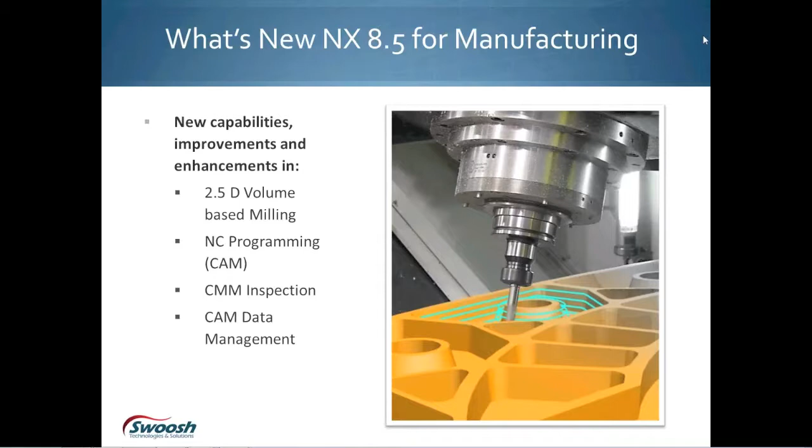So there's a lot of changes. There's a few changes inside the CMM inspection. We'll talk about those. And then the new products come out for CAM management. So there's a new product that we can go out and actually manage all of our CAM data, including the NC programs, the NC setups, everything all the way down to the shop floor. So we'll take a look at all that today.

So first thing we're going to take a look at, though, is probably the most exciting aspect of the new release of 8.5, which is 2.5D machining. And 2.5D machining is more of a volume-based machining, where it's going to look at what has not been removed away from the part yet, and what needs to still be removed from the part that you're trying to machine. So it's really that we're just selecting the face, and the system's going to analyze it and determine where we need to machine and where we don't need to machine on the parts.

So it's like it says, very fast, very intuitive. You're just picking a face. The system's going to update with the in-process workpiece, so it works with the in-process workpiece, and it's great for prismatic parts. People have reported back as much as 5 to 10 times faster in programming methodologies. I've actually programmed parts 50% faster with it, just because I can pick a face, pick a face, pick a face, generate, generate, generate. And it really simplifies the selection of the geometry.

I'd say it's very, very close to being as good as a first release of new software can be, without taking everybody's considerations for what their part configurations look like. So it's got capabilities to do your floors as well as the walls inside the part files. It's fully aware that the in-process workpiece exists, and it's going to use the in-process workpiece to adapt and cut to the in-process workpiece.

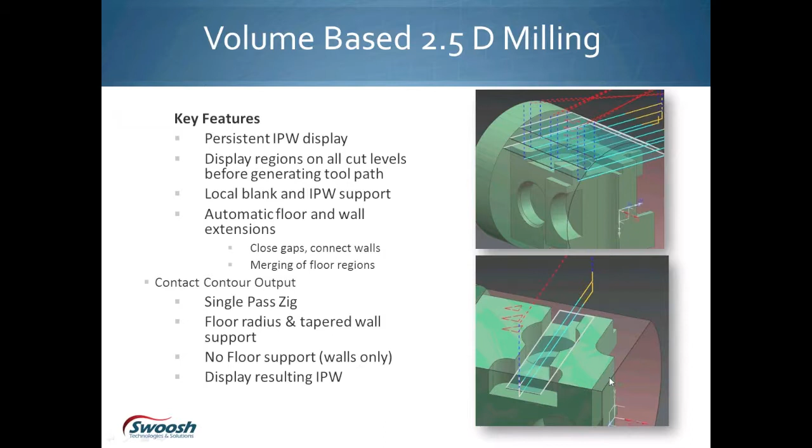But as you can see from the images on the right-hand side, the images actually show you where the toolpath has started machining. It's actually avoiding all the in-process workpiece or the raw stock that you're trying to make. So it's going to come down and get as close as possible to the starting cut position of where it found a cut level. So it's going to find all the cut levels inside the part, looking at the part surfaces you picked, looking at the part geometry, and looking at the in-process workpiece. And then it's going to develop an in-process workpiece that follows throughout the entire process.

So inside of volume-based machining, we can do floors as well as walls. We can go down the side of the walls in a stair-step motion. All we have to do is flip it from just cut on the floors to cut on walls. So when it does walls, it's going to cut the floors and the walls. Notice it's going to go over into your corner radiuses and machine all the way up to the corner radiuses, all the way up a tapered wall inside of 2.5D machining. So it's really highly efficient, almost works like cavity milling in some respects in its cut motion.

So when we look at the cut region containment, like I said, we can confine to floors, and the first two slides here are showing the containment being positioned for the floor to cut only at the floors. So it's going to leave all this excess material on the walls.

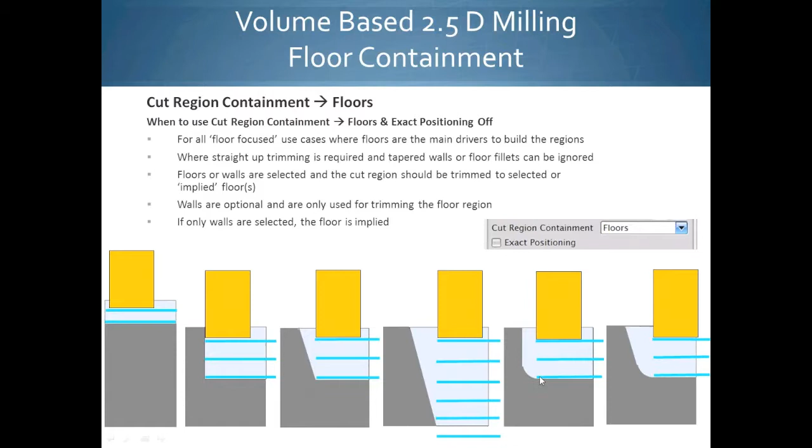So because it found a corner radius, it's not going to go over and violate the corner radius. But when we say floors and walls, what the system's going to do is take it and push it all the way over to wherever it can find a match up against the wall. So when we turn exact positioning on, it's going to actually push it all the way across to the walls.

So exact positioning, when we turn it on, is a little switch which is inside of 2.5, and we're going to see it in a minute when I bring up my parts. It'll push it all the way over to the walls and get an exact positioning up against the walls that goes in and cuts. With it turned off, I should say, exact positioning is going to actually go all the way over and cut to the wall.

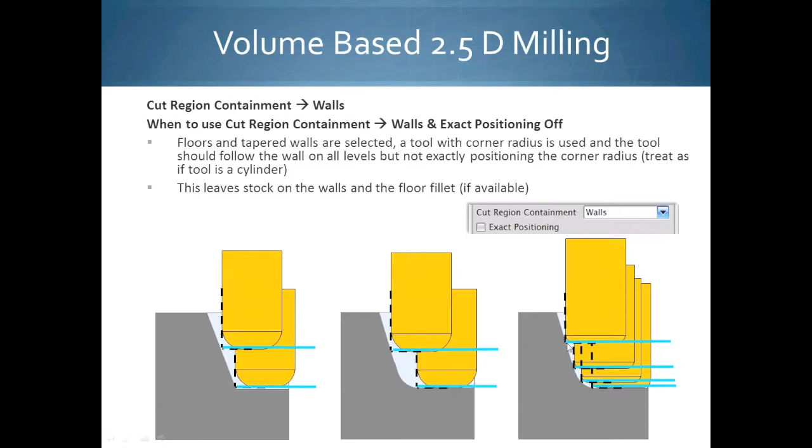Then you can actually tell that when you want exact positioning, it's going to go over and cut, and when it's turned on, it's going to actually come out and become tangent to wherever that angled wall is. You can use ball mill tools or bullnose tools as well as taper tools inside the volume-based machine.

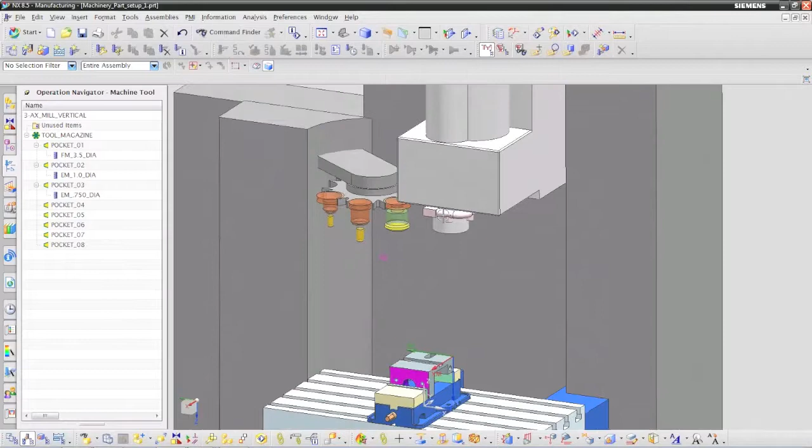So let's go ahead and take a look at the 2.5D machine. First thing we're going to take a look at is one of my parts that I have. I have a setup already pre-made here, all set up, ready to go. Standard prismatic style part. It's on one of the machines that are inside of the Siemens folders. So you have all the capabilities to open this machine up and play with this machine. So let's go ahead and take a look at what I've got set up so far.

I just have the program group set up as program 1, and I have 3 tools in here to go ahead and cut the part with, and then I have my standard MCS and my workpiece. Now, one thing you're going to notice is the color changes inside of your part files. Siemens is color coding everything now. So when we select on a piece of geometry over in your navigator, it's going to color code it to a different color than what you've seen in the past. So it lets you know that that is the piece that has been selected inside of the workpiece.

Before, it would just, I think, highlight the edges. Or you had to come into the workpiece, pick the workpiece and then turn the flashlight on. We don't have to do that anymore. We just pick on the workpiece. It's going to show you the outline or the shape of the block, in a different color for the raw stock, as well as the piece that we're trying to machine inside NX. So they've done a lot of enhancements to make the product a lot more user-friendly, faster for you to program inside of NX, which they've done a very excellent job.

So the first thing we want to do is actually create a brand new 2.5D machining operation. So I'm going to go ahead and insert a brand new operation. It's located off the mill planar dialog. The first thing you're going to see is that these icons up here have kind of changed. They've also shortened up a lot of the icons in some of the processors. So if we look at mill contour, they've taken a couple of the icons off that were really relatively just duplicates of other icons. Mill multi-axis, they've really taken quite a few off. So they've tried to make it easier for you to pick, make your template much easier.

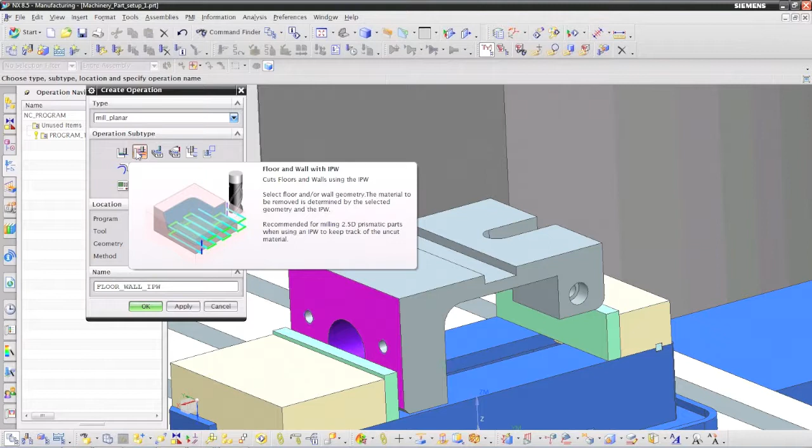and you can see all these different panels. Actually, when you create your own custom templates, you can load your custom template with this same window and explain to your users in your company, hey, this is what I'm using, here's the icon, here's what it's used for. So if you have a special one set up to do a rough on the part and leave 50 thousandths that we do as programmers, that icon up there could be a special picture plus a definition of what that icon does.

So I'm going to pick on the face milling floor wall IPW, and that's why it's got the name IPW at the end, because it does use the in-process workpiece. So we're going to leave it set for the program name to be program 1. And we're going to pick the big face mill to cut with first because I want to face this part off. We're going to look at the workpiece. That's what the geometry is going to be, and I select OK.

So inside, when I hit the flashlight, once again, it's going to show gold. I have to pick a floor. So I'm going to pick the cut area that I want to machine. First thing I do is I come in and I pick here, and I pick over here, and I select OK. Now, also over here, you're going to have tool tips that are going to pop up at different times. If I can get one to pop up, there's one. Instead of opening it up, what Siemens has done is have the tooltip pop up immediately when you put your cursor over the top of an object.

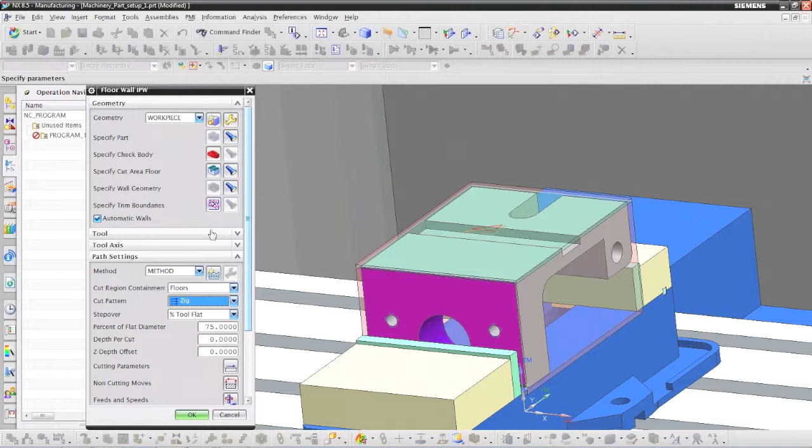So let's go ahead and leave it set to the floor. It's going to cut the floor, and now we'll generate the toolpath. That's just telling me my tool that I'm using is tapered. So now if we go in and look down below, we've got an in-process workpiece. The system's looking at the part, the raw stock that I gave it as the definition of the blank that we're machining, and then it builds a pseudo shape here. I hope you can see it on the screen, the little green area.

Well, that's telling me this is the area that it's going to go down to, and it's going to machine off flat with the face mill. So the in-process workpiece, once we're done machining, this is what it would calculate out to, and that's what it would machine down to. First, we've got to generate the toolpath, though, again. We want to change the direction of the cut. We don't want it to go from the front of the machine backwards. So we're going to go in and change the cut angle. Right now, it's set to automatic.

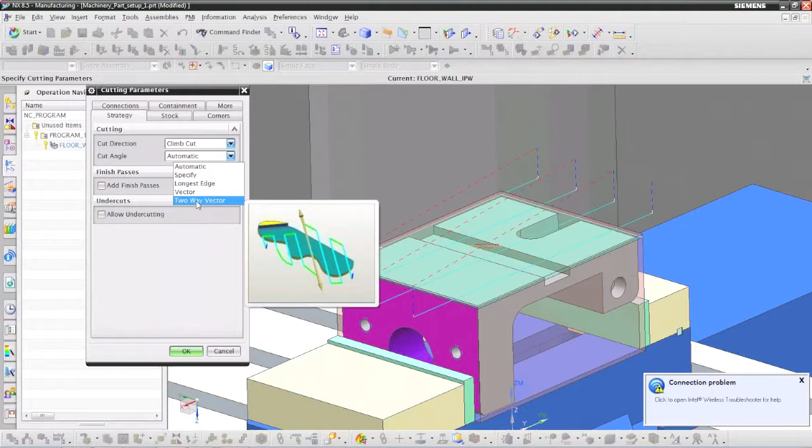As you can see, these images change too. So automatic tries to follow along. I can't slip over onto the picture. It won't let me do it like I used to be able to. But you can see that automatic usually still tries to find the longest line and the longest segment that you're trying to machine inside the part. You can also specify a direction of cut. You can say longest edge, and then you can give it a vector, cut at any orientation, or you can say two-way vector.

I'm just going to go ahead and say specify. And if you don't know, you can grab the ball inside the compass that comes up inside of NX and just turn it to 90 degrees, or I could have typed in 90 degrees over here. And we'll generate this toolpath again. Then we'll take a look at the toolpath inside NX. So I'm just going to play back. And everybody should know that, from earlier versions, we have holders that have been available for a long time, but we also now have shanks that we can apply.

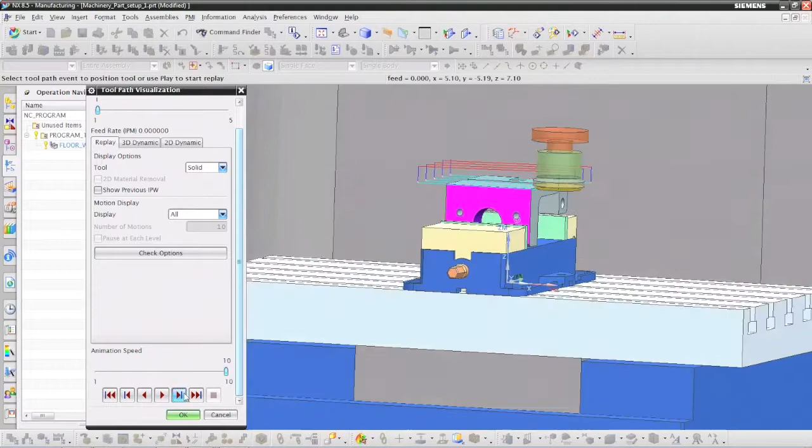I believe that came in NX 8, where we can apply the entire shank definition of the part. So the green part's the shank. What I want to do is just step through real slowly, and you can see that it's going to stay away from the part. It's going to stay away from the blank stock too at the same time, because now we can tell it that we want to stay away from the blank stock.

So I'm going to go ahead and select 2D and let it go and cut through it and do a compare. And you can see the top of my stock is now green over here, which means it's good to us programmers. So the next thing I do is go in here. When that surface is finished off, I want to cut this slot, and I'm going to go ahead and insert a new operation. So I'm just going to continue using the floor and wall IPW, pick my 1-inch diameter cutter to get in that slot. So I'm going to go ahead and select OK.

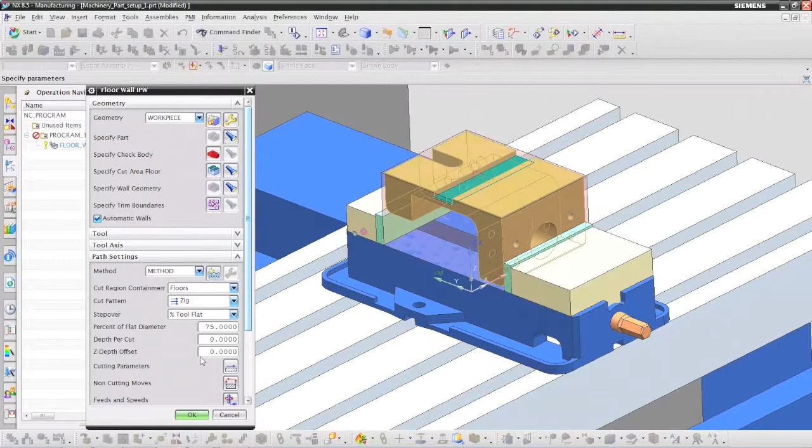Just pick the floor area that I want to cut, say OK. Now if I pick on floor area, you can see over here that it's turning it green with the flashlight. Up here it's gold, and they still both stay highlighted. So I can see where I'm going to cut, I can see where the part is at, and I can see where my blank stock is at running around the part. So now what I just have to do is go ahead and generate that toolpath. So now the toolpath's going to come down, go through it, cut, come out.

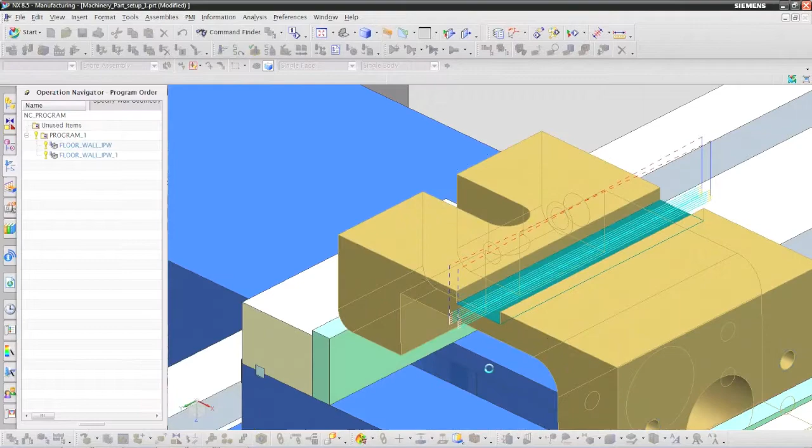Okay. Now over here you have cut the walls. So what the system's going to do is go all the way over to the walls and cut up to the walls too. This slot, it just moved over a little bit more and got up to the walls. We're going to take a look at another part real quickly in a minute of how we can stair step it kind of. What I want to do is drop it down in depth per cut of 50 thousandths. So now I got a step down of 50 thousandths. Say OK on that toolpath.

What we'll do is go ahead and add another operation inside of here, and I'm going to do the back side. Now the machine just got in my way. So I'm going to continue creating this operation. I'm just going to say OK here and go over to the Assembly Navigator and turn off the display of the machine. You can also turn off the display of the tools so I don't see them. And then the only thing I see is my part.

So let's go ahead and open up the floor and wall here, and we're going to cut this slot out that doesn't have a floor. So instead of turning on automatic walls, I turn that off, and I come through and I pick the walls. I want to specify my wall geometry here, here, and over here, and say OK. Once again, I can say here's where it's at, and then I just go ahead and generate the toolpath. Now the system did a zig motion into the toolpath, but maybe I want to do a profile around that entire inside area, so I just go ahead and do a profile.

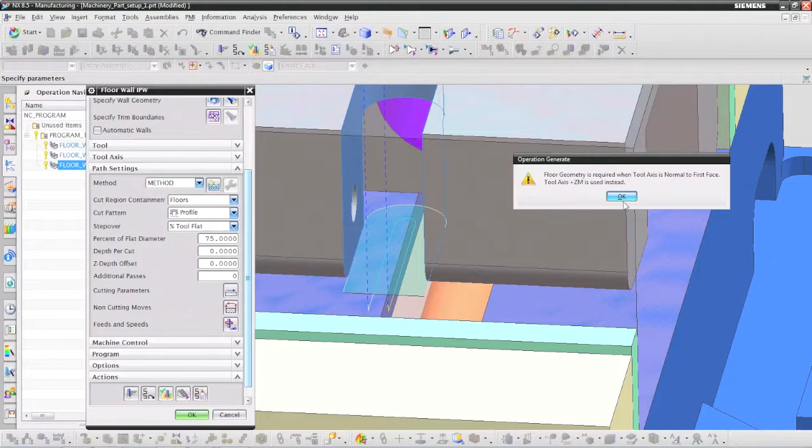Now what it's telling me here is it's going to turn the toolpath to a Z plus tool axis instead of using face normal, because there is no normal face down here. I don't have a floor face in here. So the system's going to go ahead and use Z plus and still leave it toggled to normal to face. But if I turn that to Z plus and generate, it does it automatically. So then if we turn around now and just look at the toolpath,

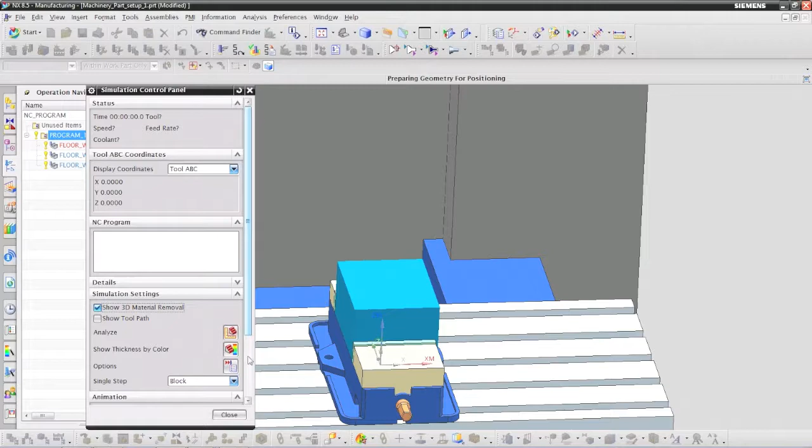let's go back and turn the machine back on, because we can simulate the entire machine. Just got to wait for it to load. Oops, I need to do one thing just to make sure it's going to do what I need it to do. I need to define the fixture. Okay, it is defined. And I want to make sure the part has been defined, which it has. Just got to make sure. Next thing we're going to do is go do the simulation. It's got to reload the blank. And then we just go ahead and play it.

Slow it down a little bit. So the machine's going to come down, go across, and cut. I want to speed it up a little bit. Now they've made a lot of improvements to the refinement of the IPW, which we'll talk about after the 2.5D machine. Let's go ahead and speed that up a little bit.

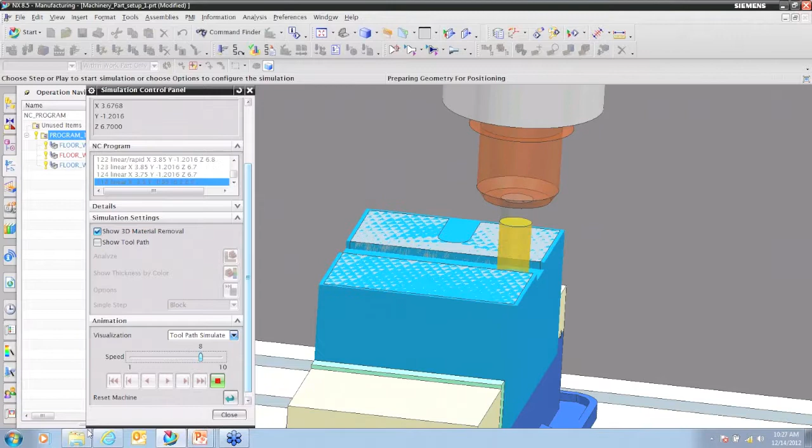Oops. That tells me right there that I need to get a longer holder. The tool isn't long enough inside the holder. So I can just say continue until reset. And then you're going to see the cutting edge down here, it's because, number one, I didn't step down into the material, which I could have with the IPW by just coming in here and saying depth per cut is 1/4 inch.

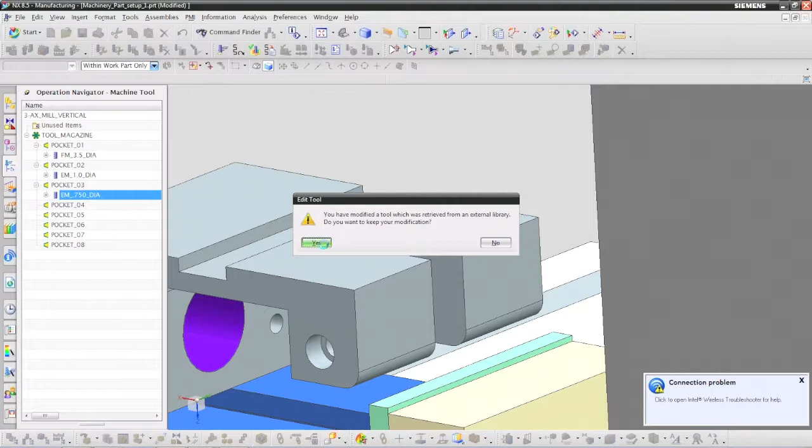Then I come back over to my tool, and I notice my tool actually is not long enough as well, so we'll make it a 3-inch tool. And then I'll regenerate the tool path because it has to be regenerated. So now it's stepping down into the part, and I got a good verification back on it telling me that I needed to adjust the way the tool path looked.

So then once again, if I just simulate that again, gotta wait for that to update, let it play through fast. And then it's going to play through. To do that the old way with either planar milling with boundaries or face milling, you would have been there quite a lot longer trying to figure out how to get that all to work correctly for you.

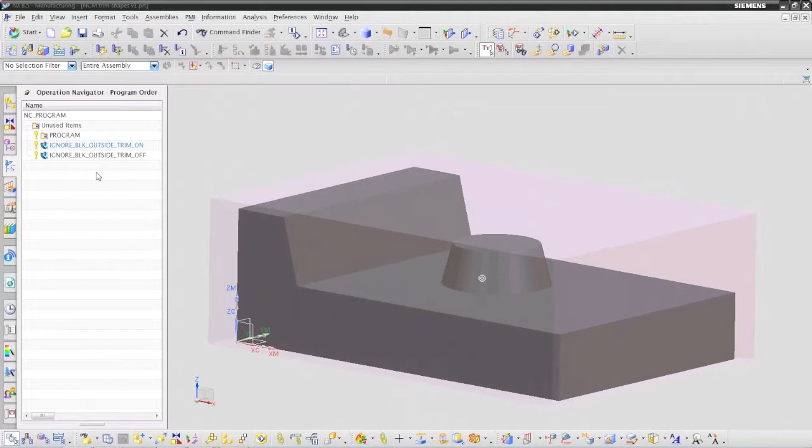What I want to do, I'm going to close these parts out, and we're going to go straight over to a more trimmed surface that's inside of the part, so we can show that it actually does go out and trim up against the walls. Throw those up here, and we'll insert a new operation. Once again, I'll pick the operation for the IPW, make sure my mill is picked, and select OK, and just pick the area that I want to cut.

So I'm going to let it pick through and pick that face, select OK, and it's going to tell me when I select on the flashlight for the wall geometry that it's found this wall and it's found this wall, because it's done an automatic wall and found where the walls exist. And we're going to be doing a zig pattern through the part. And so it's going to come over in this area.

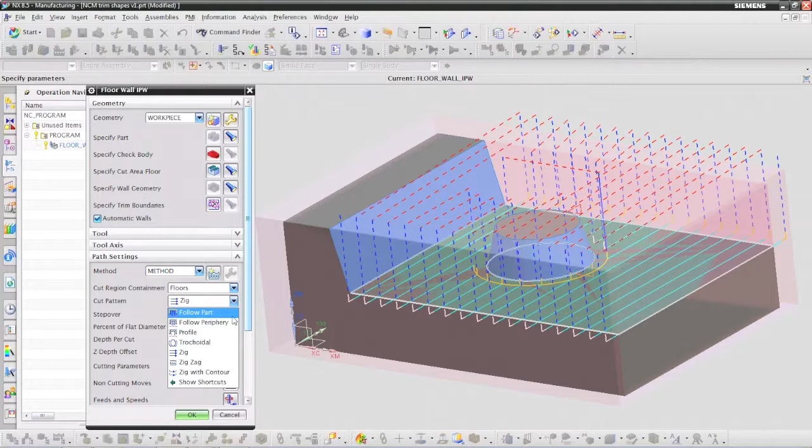Now, underneath the cut patterns, they give you all the standard cut patterns: follow part, follow periphery, profile, trochoidal, zig, zigzag, zig with contour. So if I was doing this as a pocket routine, I'd probably say follow part or follow pocket, one of the two. And then it's going to follow the part in the actual contour that it needs to follow. So I actually need to add some depth to it as well, and select OK, and then generate the toolpath.

That's a metric part. That needs to be a little bit bigger. Too much toolpath. Let's make a step down to 2. There we go. So now you can see that the toolpath is actually cutting the part out. And we go ahead and play that back really quickly. Let's leave a big post. And there's a couple other switches that I need to probably turn on to make it more efficient.

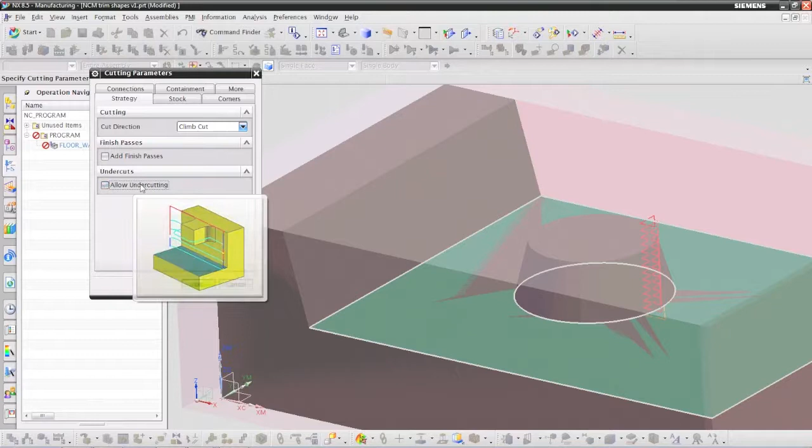But underneath the cutting parameters for 2.5D machining, you've also got the allow undercutting switch still, where it allows it to undercut in specific areas that you really want it to cut where it shouldn't. That was one of the problems with face milling, that you'd go to cut up against the wall, and if there was a radius there in the corner, you could never get face milling to go all the way over to the corner. So we turn that allow undercutting on, and then it would allow it to go across it.

The thing that's different about 2.5D machining is now you've got the blank capability for containment. So we can actually tell it we want to do it by 3D in-process workpiece, by the blank geometry that exists, or you can give it an offset thickness. So when you say what's the floor thickness, what's the wall thickness, the system will analyze it to whatever thickness you give it. So even though you don't have a blank or the in-process workpiece, you can go ahead and just put a thickness inside and apply it.

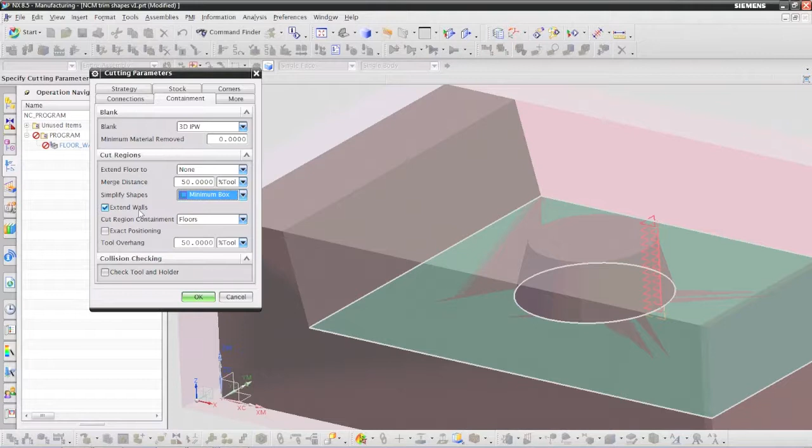To really make the 2.5D work well, you should have a blank, and you should just use the 3D in-process workpiece. Under simplify shapes, I would just say let's do minimum box all the way to the wall, all the way to the box. You can also tell it to extend to the walls, the cut regions. Once again, it's just the same switch from the outside. Are you going to do floors? Are you going to do walls?

Well, now let's go ahead and set it to walls, and we're going to get a different result because it's going to go all the way out to the edge of the walls. So now you can see that we're getting complete coverage all the way out to the wall, which is really nice. So it kind of behaves almost like a cavity mill does in its process. Let's change that to follow part. And you can see it cuts it, which is really, really sweet, because you just pick the face, you're done.

Generate toolpath. And if you've already got a template set up with, hey, this one does floors only, this one does walls only, this one has 50 thou stock, and you set your templates up correctly, you're really only just picking geometry at that point, and that's all you ever have to do is just pick geometry. Let's see if there was anything else in here. We have clearance for tool holders, which becomes more important now that NX has extremely good tool holder support.

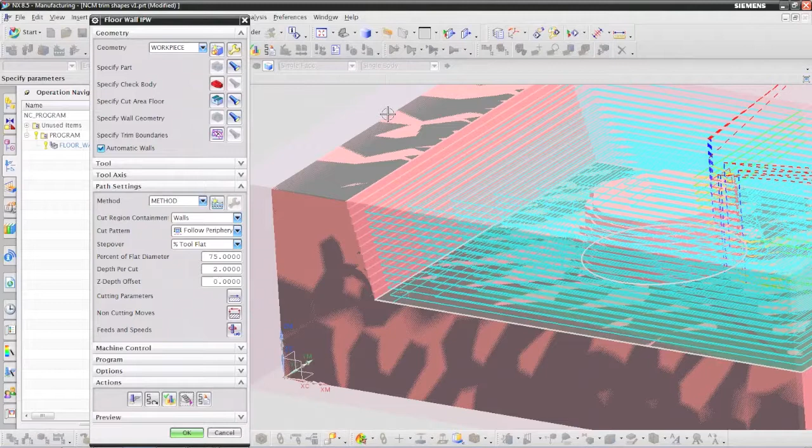The only other switch is to show the in-process workpiece once it's completed, and that's what the in-process workpiece would look like once it's completed. So we can use all different kinds of cutters, you can use taper cutters, bull nose cutters, or not ball mill, but I haven't tried a ball mill with it yet. We can do that right now, in case somebody's wondering. I haven't tried it with a ball mill.

So what I'll do is I'll go ahead and just try it with a ball mill and copy that operation, paste it inside here, and we'll go back to our program order view, and I'll drag that one out, which is the good one, put it in here and regenerate that toolpath. And it works with ball mills too. So any type of tool, ball mills and bull nose, tapered cutters, any type of cutter that's out there.

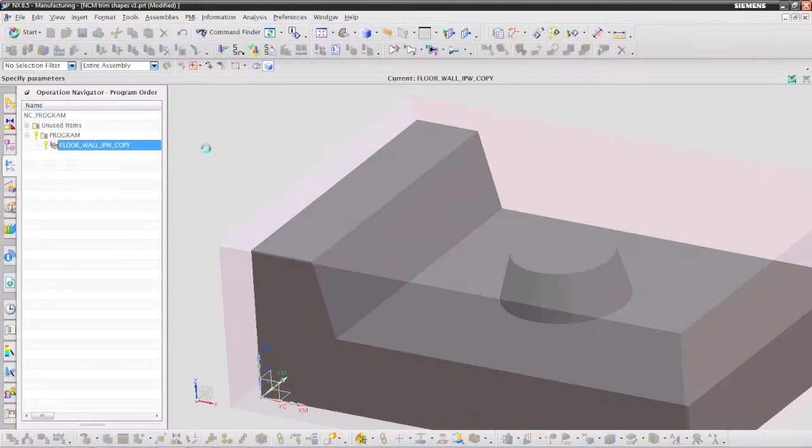Let's see, for 2D, just to finish up with 2D here. We talked about all that. You can use check geometry as well as trim boundaries. So if you want to isolate a zone out for trim boundaries, you can do that. It's inside the capabilities of 2.5D machining. Here's a little snippet that Siemens has given me to show you that if you turn on ignore outside trim, the system's going to ignore the blank now. If you tell it to see the blank, the system's going to recognize that the blank exists. So that's underneath your non-cutting moves.

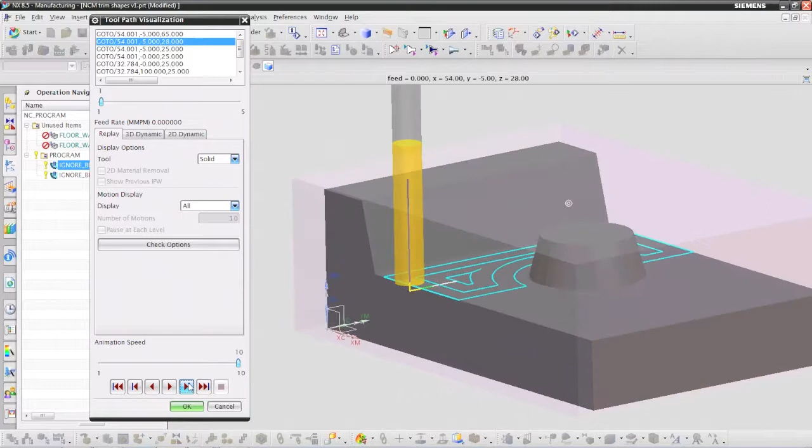You go in here and now you can say ignore blank on the trim side. So when I have an area that's getting trimmed, I can say to ignore the blank, and just go ahead and go in and cut from the blank. So that's a little switch under your non-cutting moves that's really, really useful. I've used it already. So when I turn it on, it's going to ignore the blank trim area, like it wasn't there. So if that stock is actually there, if you can see the pink, crash, you're going to put that tool right through that material. And maybe that's not what you want.

What you really want is this, for the toolpath to come in and go right along the outside of the stock, offsetting the non-cutting moves by the distance from the actual blank stock, and then go down the side of the part. So now it lets you offset from the blank, and that's what it should have been in the beginning, but they got around to putting that in the package for us as well.

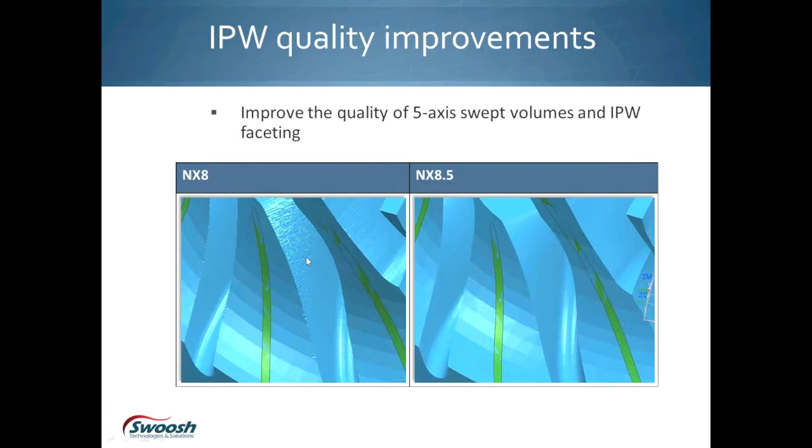What they've done too is increase the IPW quality inside of NX. So now instead of having terrible looking IPWs, which fractured up the surfaces quite a bit and made them a lot more jagged and a lot less reliable when you go to machine inside of NX, they reworked the entire engine, so they're getting much smoother results now instead of the older style IPW. You can also see that this was NX8, so instead of mimicking the shape of an actual radius, you would have multiple facets going up and down the side of the part.

And like it says, the IPW has actually been increased. It now uses multiple CPUs, so when it does its calculations, it can use up to 3 cores for its CPU. So all our multiprocessors now go through and just chunk through it a lot faster. So you can see up to 50% improvement in some of the parts. Aerospace guys have said they've been seeing a lot, like 50% improvement.

So let's take a quick look at that real quick. We have a part right here that I'm just going to play back. This is the big tool that came in and roughed, and here's the small tool. And if I tell it to go ahead and use the IPW and play it back in verification mode inside of NX 8.5, oops, I want to use the 3D dynamic, and just let it go ahead and go through it.

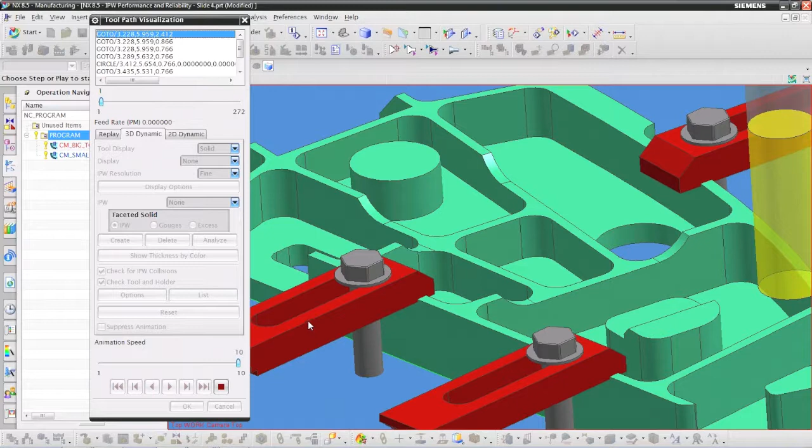We're going to see that it's going to actually make a lot cleaner, a lot smoother representation of the model inside of NX now than what we've ever had in the past. And they're still working on it to refine it to make it even better. It just takes time to make all those calculations. So I'm just going to hide everything inside here, all solid bodies.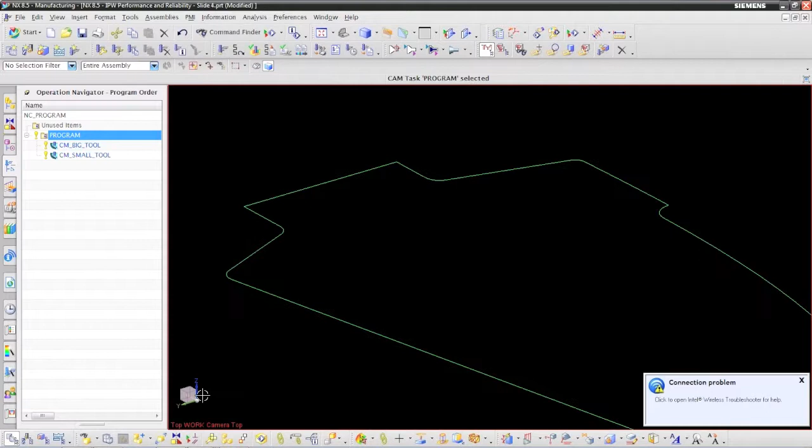So now you can see along the wall that it's a much, much smoother representation of what that solid body needs to be as we go in. Much cleaner. Much cleaner here too. Plus the calculation time is much faster. You saw it go through that process really quick.

In the past, we would always do 2D dynamic. It just seemed like it was always faster. But now the 3D dynamic has sped up quite a bit. So you can just see how much faster it goes through. Now, if you've got a gigantic part, it's still sped up for all parts, but it's just relative to the size of the part. And close that one out. So the IPW had a significant rework done to it inside of NX.

Next thing we want to take a look at is some of the fixed and variable axis modifications that took place inside of NX. For cavity milling and area milling, what they've done is a lot of cleanup of the toolpath. So inside of NX8 and previous versions, we'd get a lot of corner areas where the software would have a little bit of problem trying to figure out how to put in the different toolpath motion inside of NX. So what they've done is really went through and fixed a lot of the processors to do much more refined calculations of these smaller areas that NX needs to go in and look at.

So for all of your operations like Z-level machining, 5-axis with Z-level, cavity milling, plunge milling, area milling, they went in and actually re-enhanced the engine that drives behind the scenes to make this calculation. So now you get a much more refined toolpath than what we ever had in the past. Some of the old toolpaths, as you can see, would leave material in areas that would be jagged and go up and all kinds of other weird stuff.

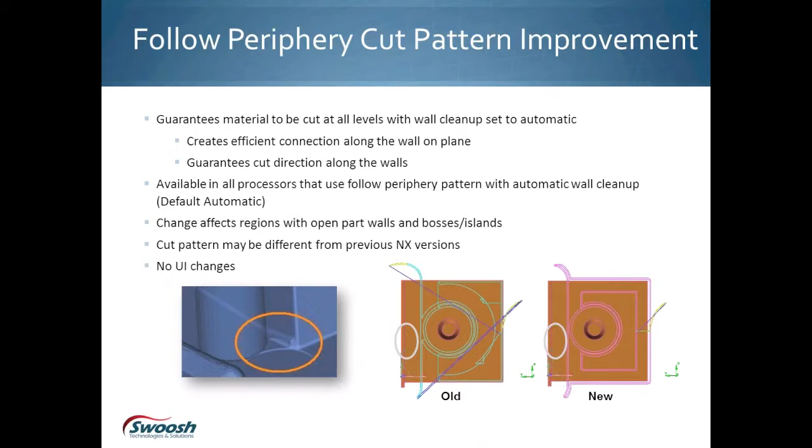You can see here's just another example of localized cutting. On a part that's very large, what they found out was they were getting problems with the toolpath before NX 8.5 with the way the toolpaths were looked at and then calculated for how the toolpath should get applied to the part. So you get a lot of jagged areas on the part. Now they've reanalyzed it and found out there's better methods inside of NX 8.5 to actually cut all those different surfaces inside of there.

They've also significantly enhanced FlowCut. FlowCut before was a great product.

It's just that now they've actually added the capability to apply a Z-level toolpath inside of FlowCut. So when you're going to the mold and die guys, even aerospace, they have to get underneath flanges. We can say for the bottom we want to use the standard lacing type motion inside of all our corner radiuses. But when we're going up a wall, up the side of it, we want to use Z-level.

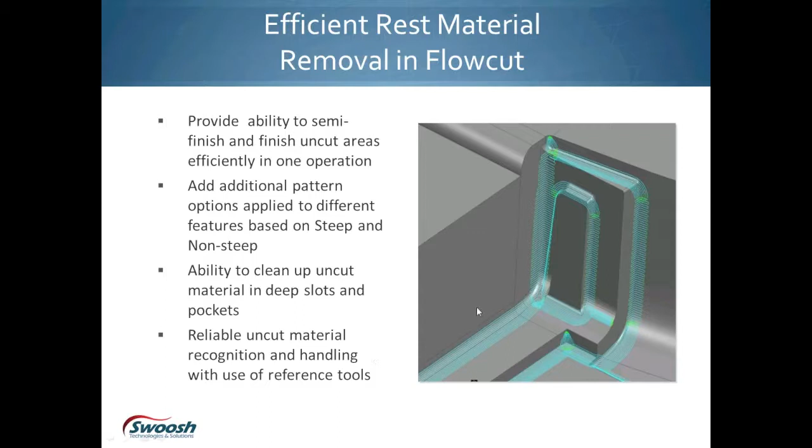So what they've done is they've incorporated Z-level inside of FlowCut so that we can actually trace up the wall and tell it we want to cut this with Z-level and cut this with the standard FlowCut. So it's really been enhanced and it works extremely well. Like it says, it's got the ability to clean up uncut material in deep slots as well as pockets. It has very reliable uncut material recognition and handling, and complete use of reference tool is still built into it.

As it analyzes these tight areas, you can specify for these areas that you want to use standard FlowCut, but when we're tracing up the walls, that's when we want to use Z-cutting. You can also do a manual mode where it'll break it up, and you can say I want to use this manual mode or that manual mode.

You can flip the toolpaths around so that I say I want to do Z cutting here, and I break that up from the operation. I can either say I don't want it in the same operation, or within the operation, let's split this up and reorganize it so this is done first and this is done second. So they've added that in there.

This is just showing you they consolidated rest material removal inside of NX. So now this is clearly showing you the Z-level in the FlowCut. Here's the dialog. Non-steep, we're going to do a zigzag with lift, so we go around here and zigzag it. But for the steeper areas, let's do a level zigzag, so it's going to cut with level zig motion. Those are the three that were added at the bottom: Z-level zig, Z-level zigzag, and Z-level zig with lifts.

You get true ref tool selection now, so you can actually pick the tool that was used in the operation before. Ball mills and bull mills are reference tools now, so you can use both of those. It also improves the rollover for the edge. Let's take a quick look at some of these operations, and I'll show you how some of them have improved. So when we look at a before NX 8.5 operation, this is the toolpath using area milling.

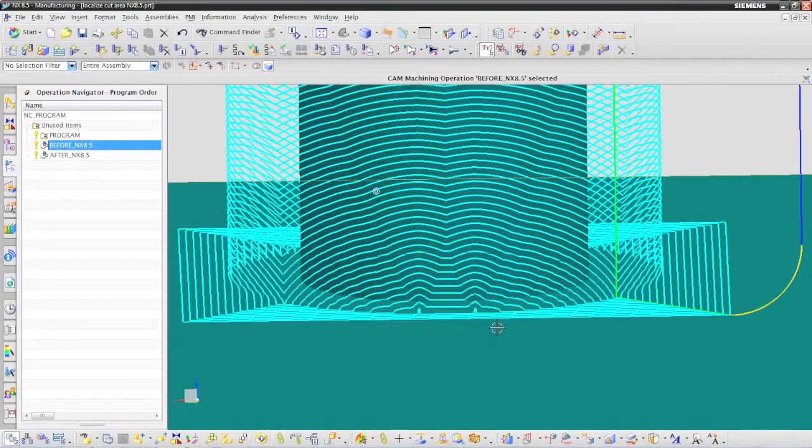You can see all the jagged motion, and I'm sure everybody's seen it and been dismayed that the toolpath was going to look like that. But now inside of NX 8.5, our toolpath is going to look much more refined, cleaner, no jagged shapes. Over here we're going to get a much smoother shape. It's trying to follow the shape of the part much cleaner, and it gives you much better results instead of the old version, which produces all these terrible looking spikes in the toolpath.

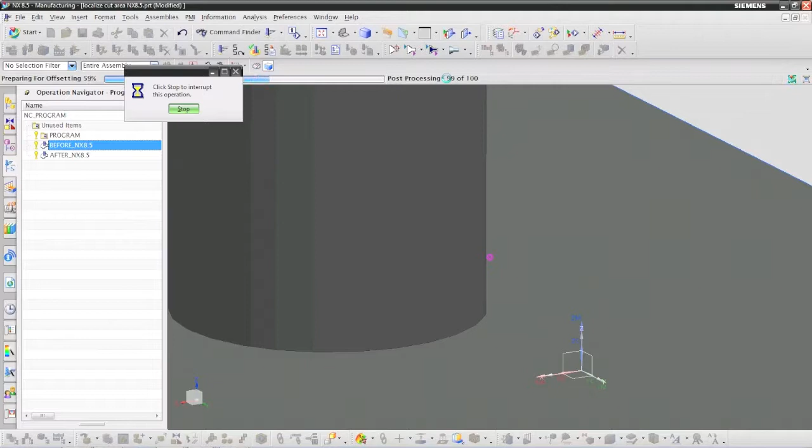So if this was an old operation, I would just go ahead and regenerate that toolpath. These are things that you don't have to do yourself. They're just functions that have been incorporated into the processor, and the system's going to automatically create a better toolpath. As you see, it just created the toolpath, and it shows you the older toolpath versus the newer toolpath. Just a simple regeneration is going to give you a much better surface cut.

Let's take a look at this toolpath over here. This is doing some flow cut with cross-sectional cuts. It could be done multiple ways. So when I select flow cut, what we're going to see down here is flow cut also has the same options we had before, where you can cut with zigzag, zig with lift. But now you can say non-steep areas are cut with a level zig or level zigzag or level zig with lifts.

You can also do the steep that way. So if I say cut steep with that method, then also use the reference tool. You can select any tool in here, any ball mill, any end mill, and select OK, and it's going to refine it and cut it better. So now you can see it's going through, and it did all the reference tool, and it did its trace lines, and now it's going to come back and analyze and say, hey, how do you want to cut?

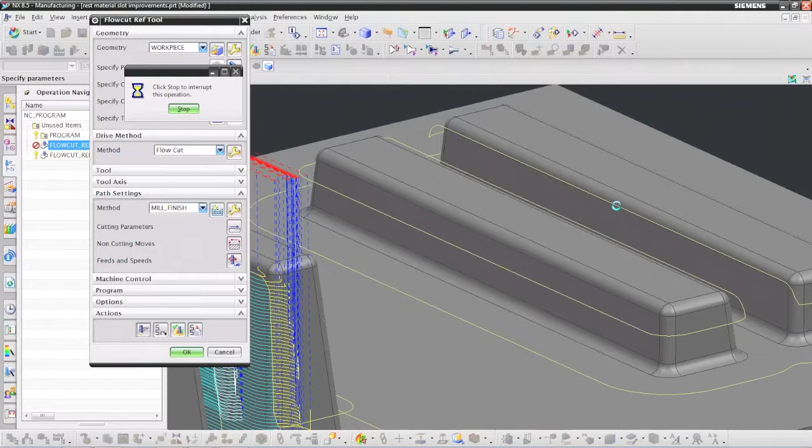So now you can see we get a much better cut going in between the part. Very much highly needed improvement to the processor. That's correct. All the options in here have stayed the same. You can use in-process workpiece with it too as well. So the blank can be checked, and you'd only be cutting in the same location, but that was always in there anyway.

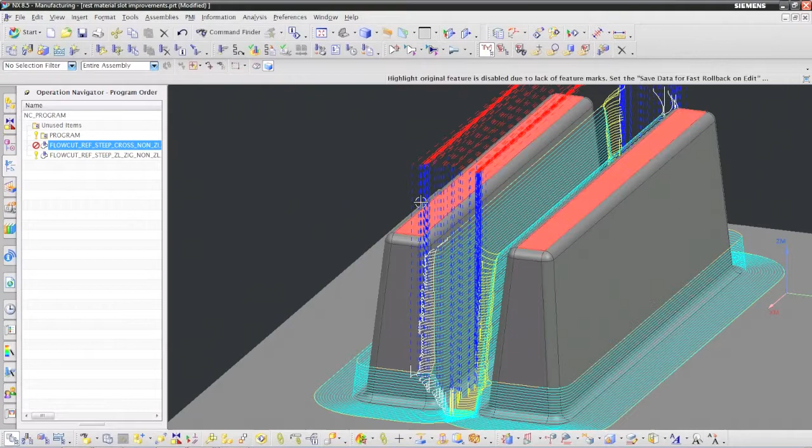All the other dialogues have pretty much stayed the same. So no, there's no new additional drive methods inside of surface machining. Same drive methods that we had available before. So go ahead and close this out. I think I had this one.

This is just a cavity mill. This is Z-level today with cavity mill. They've done a refinement to the processor to try to make sure that it understands you don't want to jump off of areas and jump and re-engage back to those areas. So this is what it looks like today with a toolpath. So it's going to jump off at each one of these corners.

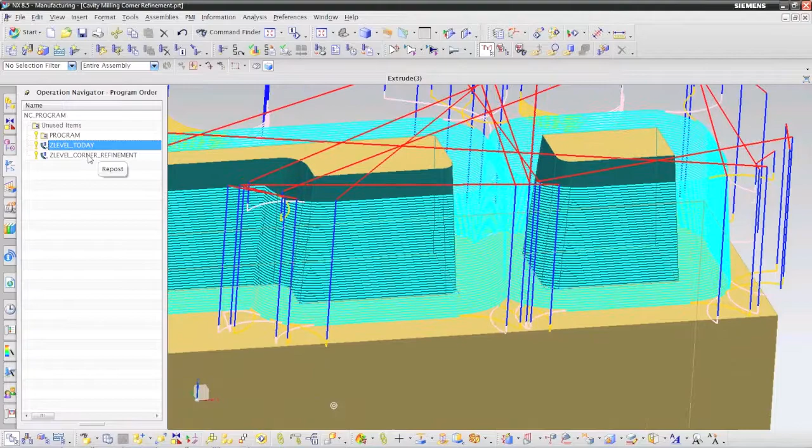Now when you come back in here and select the corner refinement inside of the product, it's going to go out and refine the corners and make it not jump around as much as what it was doing. It's going to refine it a lot more, take out a lot more of those different steps. As you see, it took them out down here. So it's not going to jump out away from the part as much.

Same thing happens here. If you go ahead and regenerate this operation, it's going to update it to the new Z level. So it took a lot of the motion out that it could find, and they're still refining it today as we speak. They're still going in and making sure it's better. So instead of that, you're going to end up with a much more well-refined toolpath.

So that's just something that's internal to NX. It's nothing that you have to do yourself. You don't have to turn any switches on or anything. That's built into the software. So that's what they changed. So if you see better toolpaths, it's because they've gone and created better algorithms to go through and analyze the part. So next thing to take a look at is variable axis contouring.

So for us 5-axis programmers, for aerospace parts or any kind of parts, the contour profile dialog got a complete rework. Most of the time it was, I don't want to say an unusable product, but it only had a few locations where it was really, really successful in how it would cut. But now they've got it so that you can actually use this for all types of machining. Here's what it would look like in the past. It would spike up and down the wall when it came to different edges. It would just jump off of the part in certain locations.

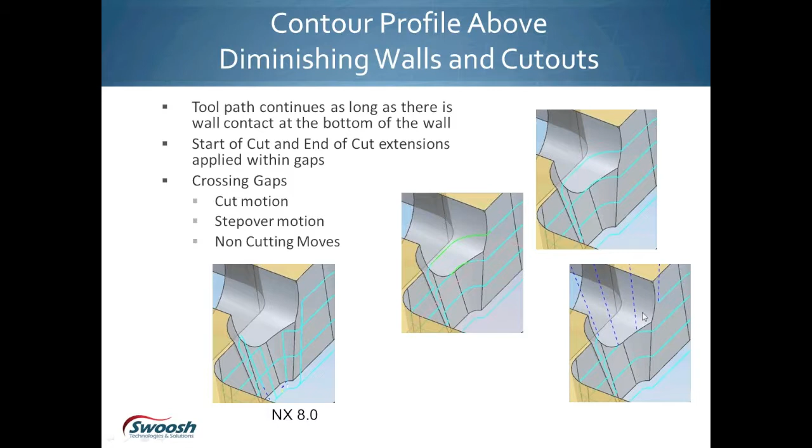But now what they've done is they've gone through and added some more tool axis control, better capability for when it incorporates a blank distance across the part. So it's been refined so that the tool path actually just goes and cuts across the voids, follows either the UV of the direction of the gridding that you've created, or it actually goes in and follows edges that you want it to follow. So the system has gotten much more robust.

What they also added was ring height control, so that as the tool is coming up this wall, this is a circular type wall or a round wall. As it goes up, you can define where your ring height is on the part, and the tool is going to stay tangent at that tool point back to the surface that you're trying to machine.

So they just added this inside contour profile. We've had that in sequential mill, but it was always harder to do in sequential mill, because contour profile is more of an automated product. So let's take a look at that really quickly.

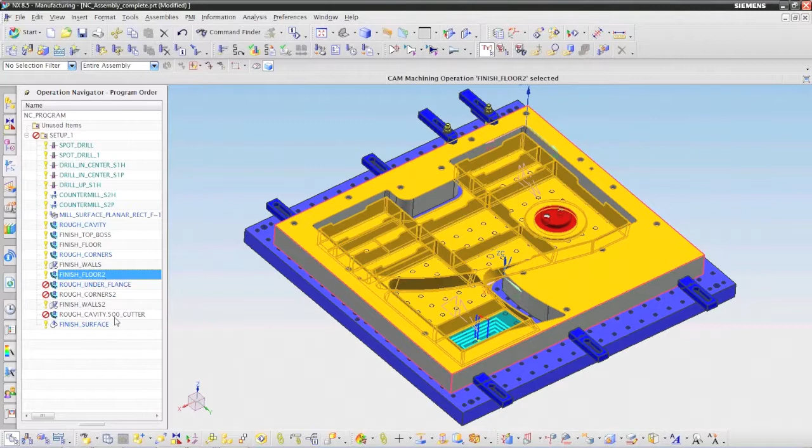And I just want to... this is how we would have done a standard aircraft part years ago with sequential mill. So we would go in with sequential mill and tell the processor, hey, I want to pick this wall and walk all the way around it. So what they're trying to do is get the processors for contour milling to actually go in and just detect all these walls and detect all the floors.

So what I'm going to do is go ahead and pick a new mill multi-axis operation, and you can see you still have your sequential mill. It's a great product. Z-level 5-axis machine. That's still in there. Fixed axis contouring, but here's the contour profile. And I'm going to go ahead and pick this tool. Let's use that undersized carbide.

And then I've got to see where my geometry is going to go. Got a couple pieces of geometry in here. Main work piece. That'll be good. And I'll select OK. So the next thing we do is we look at the contour dialog.

What's really changed in here a lot is that the tool axis controls now can, instead of just being automatic and trying to determine where it was at, you can also do align to edges when the surfaces are picked. It's going to align to the wall's edges. Or you can do a swarf to the UV grid direction. I typically leave it automatic now and try to see if that's going to get what I need.

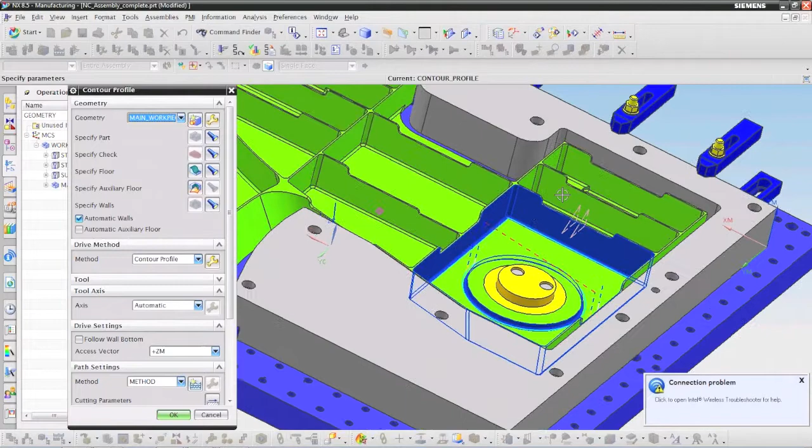Now, I'm going to go ahead and fix this because out of the box, the non-cutting moves are set up to come straight down. So your engage is set to linear. It should actually be something like an arc normal to tool axis, and these two should be set to look at the open area. Retract should be the same as engage. And then when I regenerate, it'll radius into the wall and radius out of the wall.

So the selection of the geometry, you don't have to do it except for picking one face. Bam, and the software will automatically detect all the surfaces that run around the pocket. You can also do multi-depth offset with it, just like we could before. So select the wrench. If you want it to cut across the wall's gaps, you say cut across it. If you want to step over it, step over. If I want it to go...

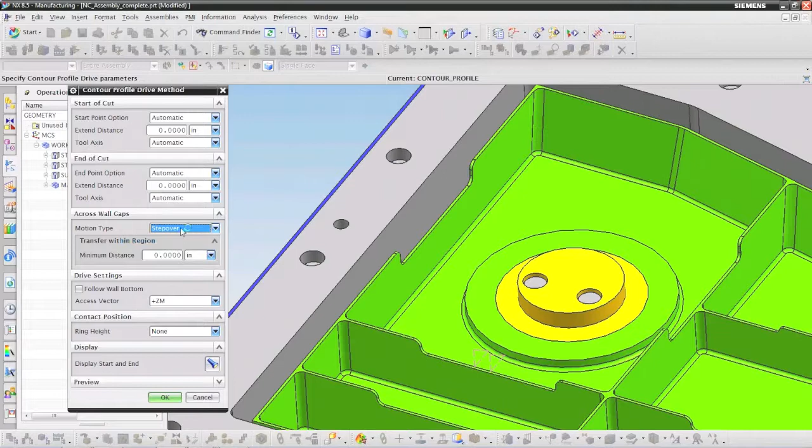Because here's what always was the problem. In this location here, this material maybe wasn't removed yet, and you just wanted the processor to go across the wall. It wouldn't do that. It would always just come to the edge of the wall, come off, and go across it. You could change your start point and end point. That's been reworked, so it's defined slightly differently. Inside the start points and end points, typically what I do is I divide the wall, and then I move my point.

Let's see, going to cutting parameters, and let's just do multiple passes for depth. So when I put my cursor over the top of multiple depths, you see the little image comes up. I don't remember what the height is for the part. So we'll just do an analysis, measure distance. I'm going to do a projected distance, find out what that distance from the top to the bottom floor is, 2.45.

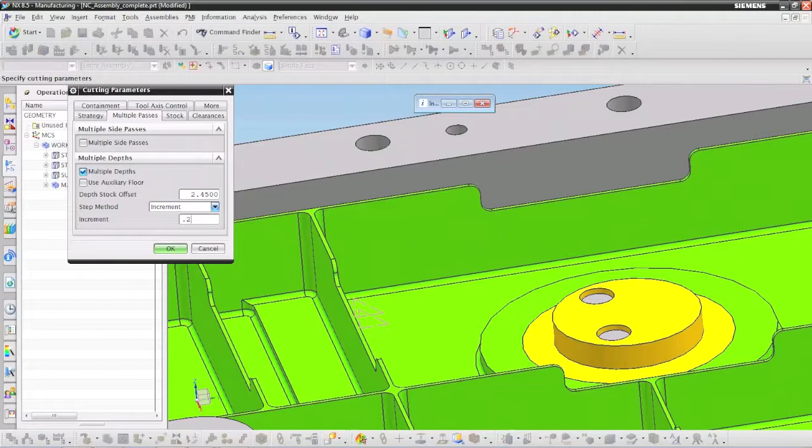So my depth stock, 2.45. It will increment at .2 inch with our step down. Say OK. Generate the tool path. And it's going to make its cut passes through it. This takes time for the calculation to be made. As you see, I turned the switch to tell it when it found a gap, jump over the gap, and that's what it's doing. It's calculating out the gaps and it's calculating the cut motion.

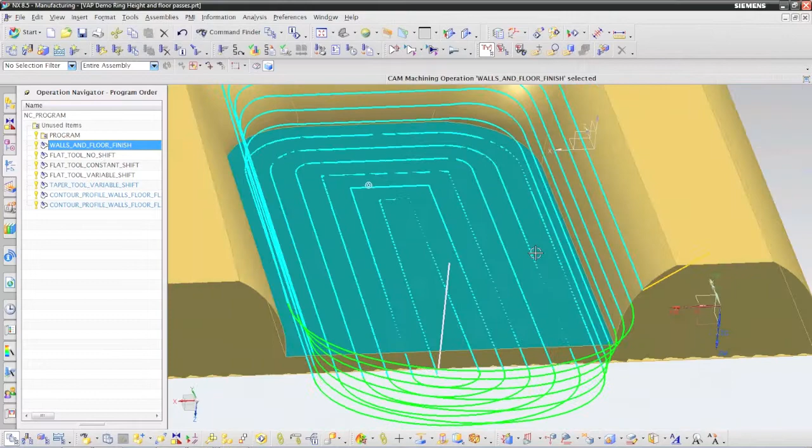So let's close that one out real quick. And then, let's see, I got this one here I would like to take a look at real quickly. Inside of here we have multiple types of tool path. When you're doing a floor and wall finish pass, let's go into verify mode. This is using the ring height now.

So what the software is going to do is it's going to look at wherever that ring height is at, and it's going to position the side of the tool to the side of the surface that we're trying to machine. So if we go back and we play just this one back in verification, it would look different than if you're trying to bring the tool all the way from the bottom of the part.

And as you can see, it's gonna leave a wider, longer scallop in the location. So it just depends upon what you'd make for your tolerance for your step over. So that was incorporated into the product. Take a look here.

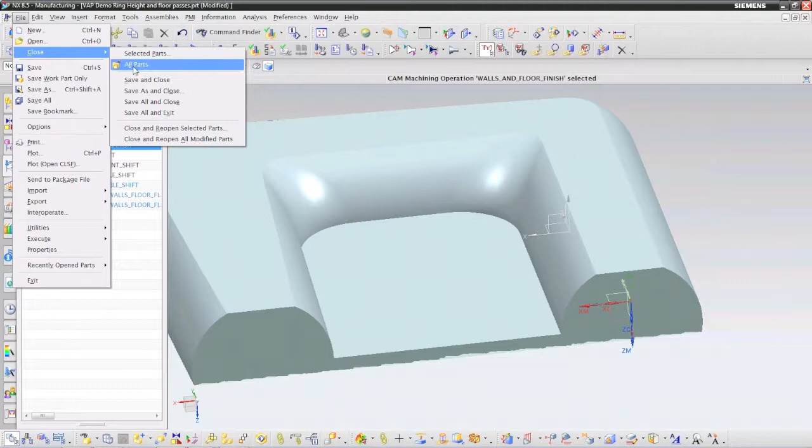So in turbo blade machining, we had a lot of enhancements too. Don't have time to go through all of them because they made a significant amount of enhancements. As we're going through a slot, they've given you the ability to reduce the load being applied to the tool. So it's going to try to slot in special slotting motion to get down into those surfaces that you're trying to machine. They've also reworked the swarfing motion that's done along the side of a tool. So it's going to align more to the blade's profile than it did in the past.

It's going to also accept multiple patches for surfaces inside of turbo blade machining. The big thing that they added was the lead to trailing edge and the trailing to lead edge inside of it. So now we can explicitly come in and say that we want to control the zigzag motions across it. And hopefully it'll help it from digging into the material too much.

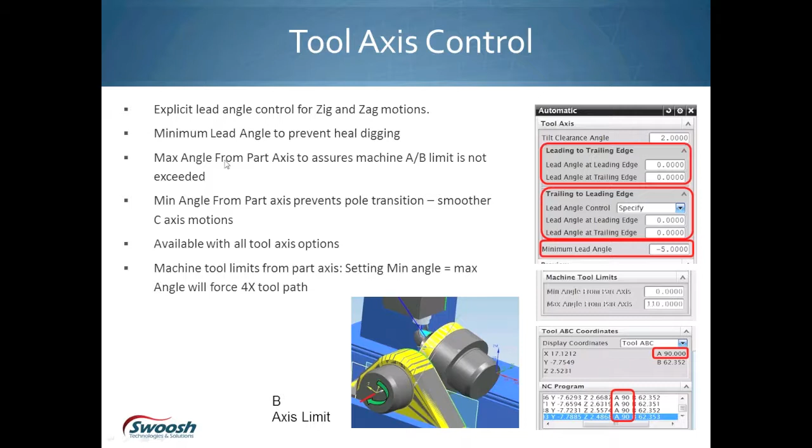They also incorporated better step-over quality inside NX to make the path more uniform across the path. So it also helps to reduce machining time because the paths are more uniform, and you don't have to mess around with it, trying to calculate it out. Real quick, here's the demo for the Blisk.

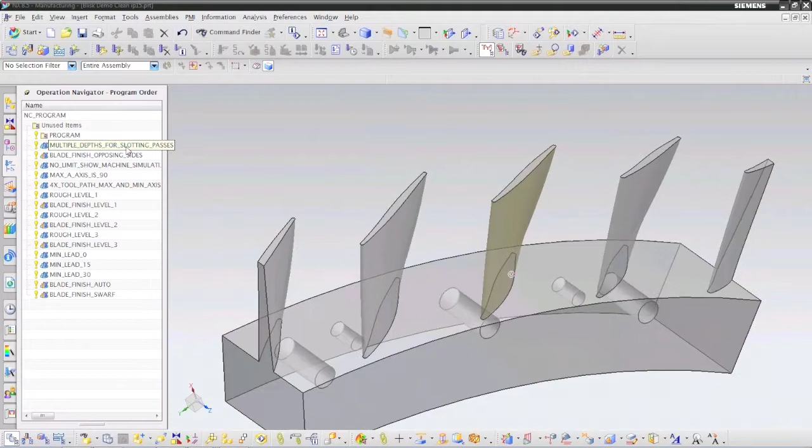As you can see, for slotting now, that slotting motion, the tool path's going to go through, and it's got to get down to this level to start machining. But now we can tell it that we want to do an enhanced roughing routine to get down to that surface, so it just doesn't come in and clonk right into the material.

And then here's an example of blades with opposing blend sides, or opposing sides, where the system's going to allow it to come in, do this big radius arc off, and come back in and re-engage to the other blade side and come through and cut on the other side. And here's another showing there's no machine limit. Here's maximum A axis.

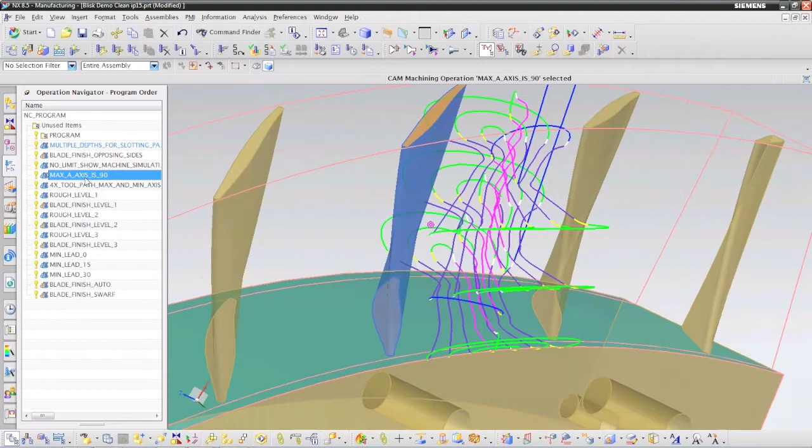Here's an example of just roughing to a level, so we can come in and rough straight down to the level and machine it. Here's a blade swarf, just showing the tool path swarfing around the part. It's been enhanced. As you can see, it's swarfing with the blade, following it all the way around the blade.

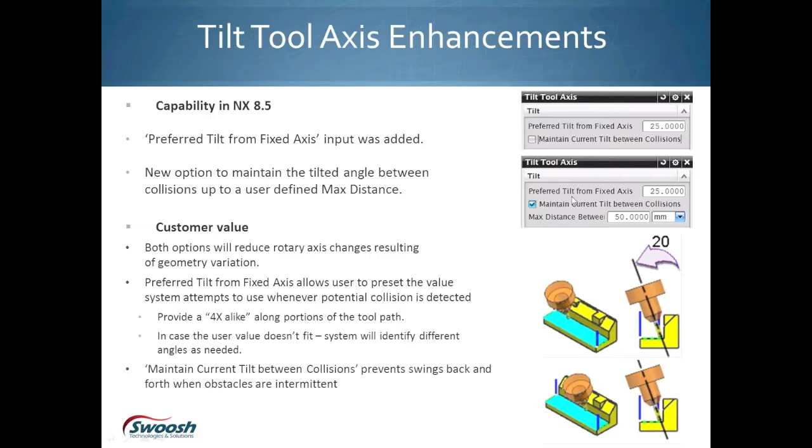So some of the other milling enhancements that have taken place inside of NX is they've added the capability for the tilting to be controlled inside of NX a little bit better, so that we can avoid collisions with other pieces of check geometry and other pieces of part geometry that exist in the model. So you can take a 3-axis tool path, 2.5-axis tool path, and turn it into a 5-axis tool path, but it will allow you to step over without crashing into the actual surface.

I'll take a look at that in a minute. I just want to talk about a couple more slides here. Streamline toolpath has been enhanced. If you ever tried to use Streamline, you notice you got this result in the system. This was due to a limitation in the software where they had made the default 100.

Now you can control it. The default is now 1000, so we put more points around that location, so it's going to follow it much more smoothly as it goes around. The control was taken out of your hands, and it was just set to 100. Now the control has been set to 1000. That's underneath Streamline's toolpath under the More tab. So the cut step can now be whatever you want to set it to.

Also inside NX, the behavior on small surface areas, where they found they had finish issues, has been improved, so they've increased the amount of points that go across these small, tiny areas. That's just something you won't see. It's just something the software is going to do.

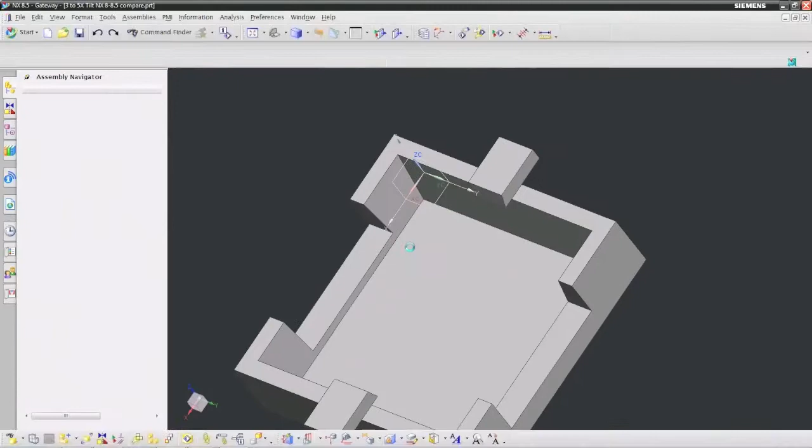So if I take a look at this 3-axis tilt operation real quickly inside of NX, say OK, it brings the machine in. This operation has a tool path that has not been tilted yet. When I look at it and verify it, it's going to be running into the clamp. It could potentially be running into the part. So we have an issue here where we need to get this tool path tilted.

So inside of NX, they developed the tool path to come in and tilt over on the axis. So now when we go to look at the tool path tilted, it's going to tilt as much as it needs to avoid all these clamps and whatever overhangs might be in a piece of part geometry. If I let it run slowly through simulation visualization, you'll see it's constantly tilting and readjusting to avoid all those collisions.

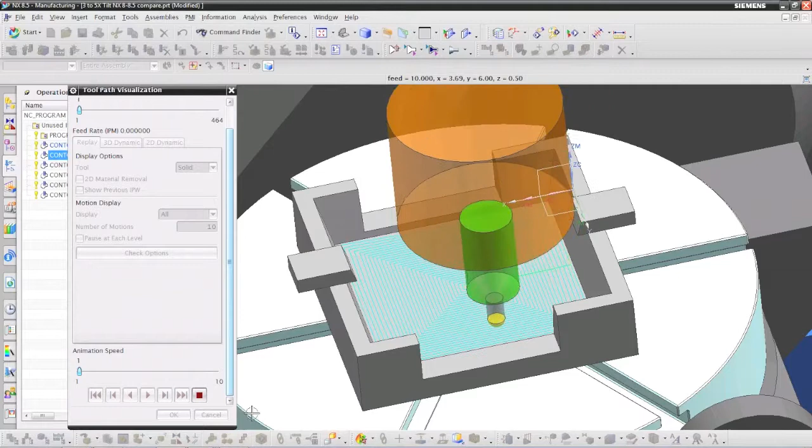Now when it gets closer to the middle, and once it can stay up in a 3-axis, 2.5-axis motion, the tool axis will just lock itself at a standard Z-axis. And you see it gets closer to the middle, closer, closer. The tilt is less and less, because the less tilt you have, the better off you are when you're machining. So then finally it just locks itself in at standard Z-axis machining.

To do that, just come in and pick the operation, right mouse button on it, and say tool path, tilt the tool axis. Then you have to say what's the preferred tilt from the fixed axis, and then maintain current tilt between collisions, and it can maintain all the collision checks. So I'm just going to put in 30 degrees here and select OK.

So this option has been added so you can develop a tool path inside NX. It was once a 2-axis, 2.5, 3-axis operation, and now it's going to redevelop it so it becomes a multi-axis operation. The only thing you have to recognize is if you try to retilt it to a different tilt, it's going to tell you that the selected tool must have a fixed tool axis. It already understands that it's been done once.

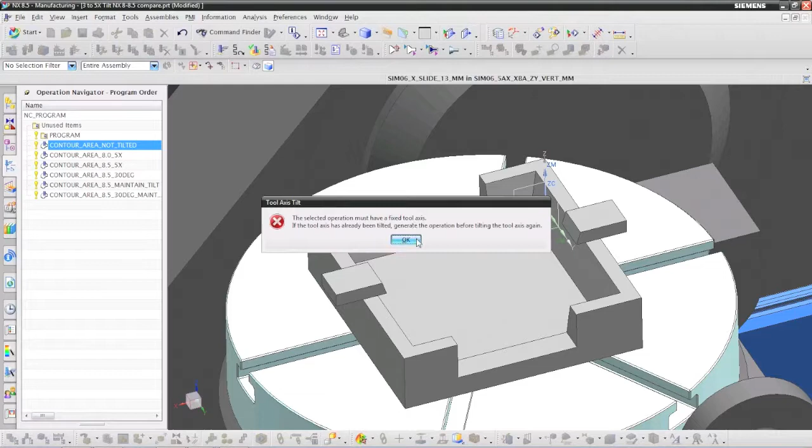So what you have to do is come back in here and do a tool path generation. I'd have to overwrite the tool path that exists. It understands that it's been locked, so you have to come back in, and now it creates a tool axis which is completely locked, or completely 2.5 axis. So you'd have to redo the tool path to tilt the axis. Real quick, Mike, we do have a question on this.

Sure. Will this work with a bullnose end mill? Actually, I've never tried it with a bullnose, but we can do that right now. I've always tried it with a ball. Let's go ahead and try that. I've never tried that with a bullnose. That's a good question.

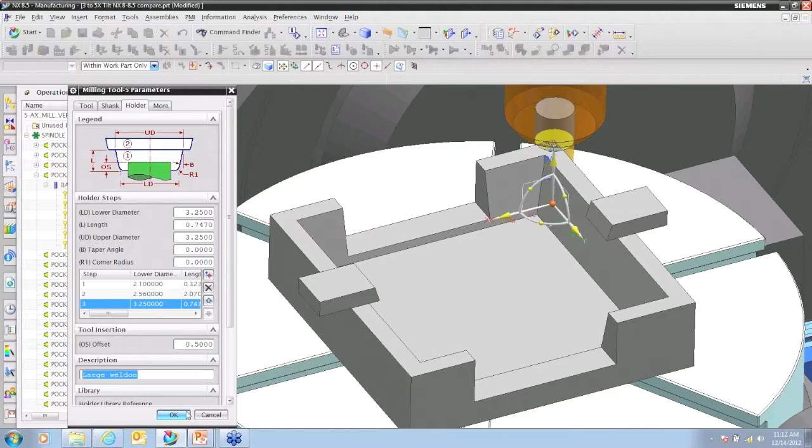I'm just going to pull a tool from the library as well. And I believe it's that one. So we'll copy this and just put it in here. I just copied the operation. I'm going to paste it inside here, then go over and look at the view. Here's the operation, and I'll just generate the operation with the bullnose. Of course, that's a sharp blend cutter. I don't think I put a blend radius on it.

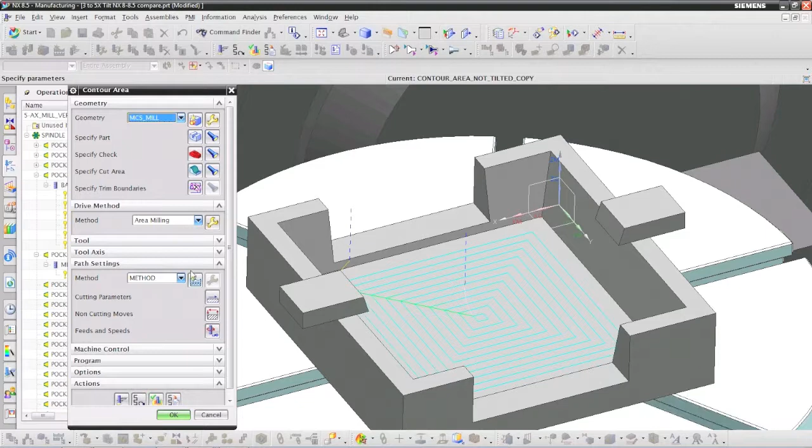As a matter of fact, let me do that. So I put a little corner radius on it. There's no corner radius on here, so we'll put something like 120 corner radius. So let's make it 1/4 inch. Change that to on part. Much faster. So now let's go ahead and say OK here, and let's do a tool path verification.

There. It's going to go through it. And then we'll go ahead and tilt it now. Yep, right there. It tells me it has to be a ball mill. So it must be a ball mill. So it could not be a bullnose.

Good question. Something I learned today. So then you just tilt it, and then you have to regenerate in order to get back the tool path that you had. And then you can reapply the tilt to it after you've done that. Very good question.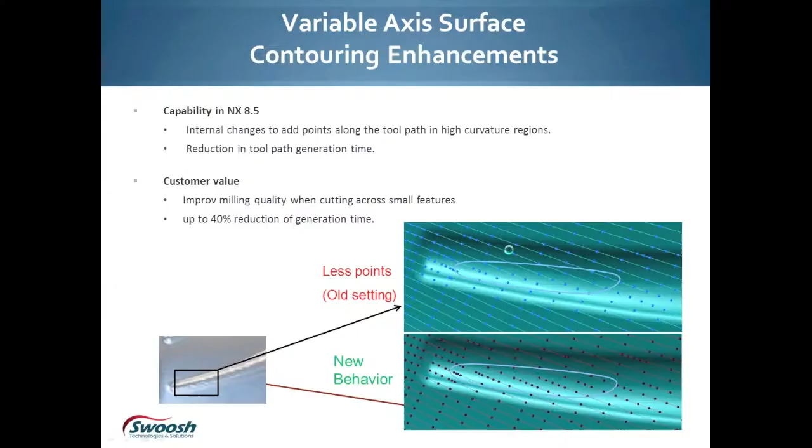So they aligned and did a lot of work with their coordinate systems for accessibility into the part. And it's been ported back to NX7.5 as well as 8.0. So the machining direction has been redefined and reworked a little bit. They've also added in the capability to specify a vector off of a surface.

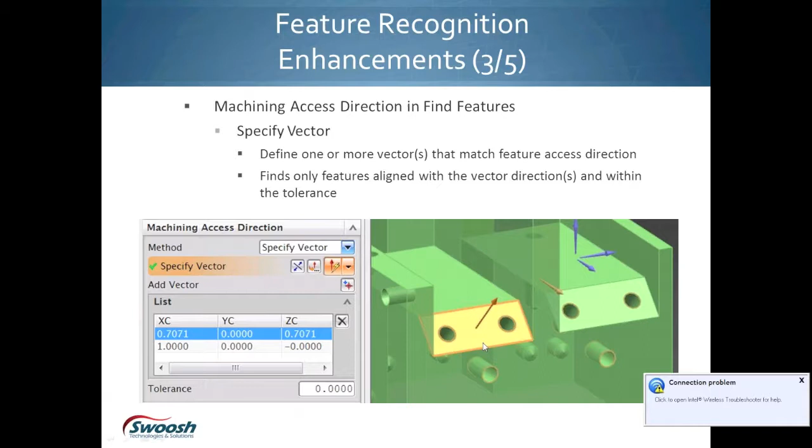So when you specify that vector, the system will say, I want to find all the features with this specification of this vector. So it would find this feature and the feature next to it at the same time. But it wouldn't find any other features in here because they don't lie on the same vector inside of feature-based machining. So they did apply that into the software.

CMM inspection had a few changes applied to it. They've applied an improved collision detection. So when you're in here probing, it automatically tries to resolve the issue of why it's crashing and help you fix it, so you don't have to go in and fix it. It knows where the part's at. It knows what point it's supposed to be fixing.

So they've tried to fix it through automatic resolving of the collision detection. So you really just have to specify the points. You don't have to specify all the collision detection inside of it. They also gave you new capabilities to do read back for measurement data. So now it really meets industry standards.

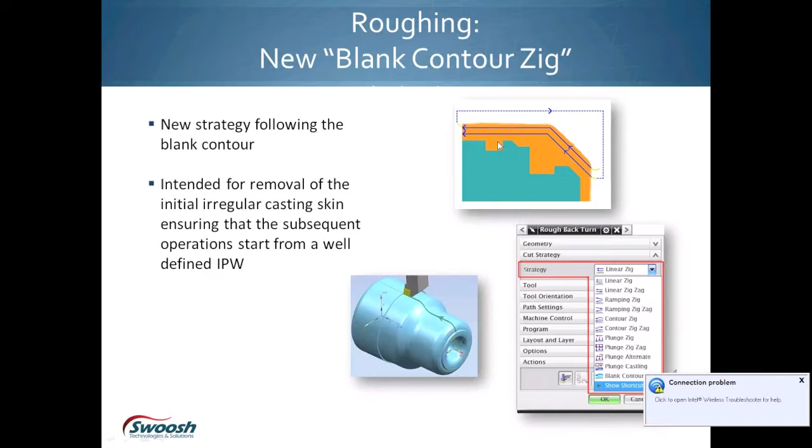So underneath strategy, instead of linear zig, you just say blank contour zig, and it'll follow the contour of the shape of the blank stock, because following the blank stock gives you a uniform cut. Following the offset from the part doesn't necessarily give you a uniform and constant chip load as you're going across the part surface up here. So that's why people are asking for it.

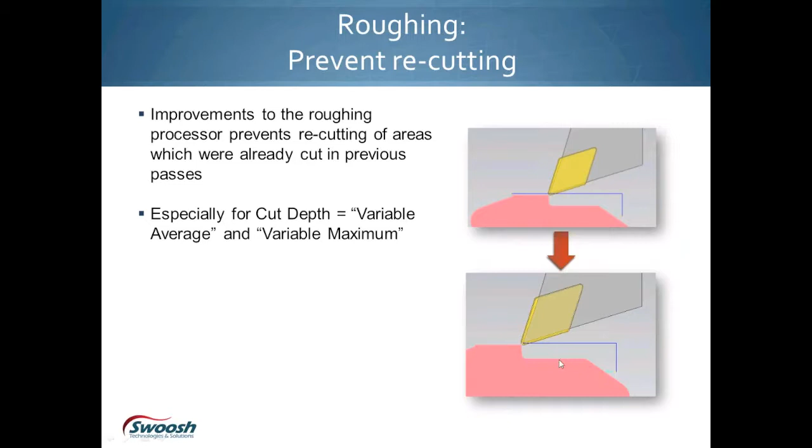Some enhancements too they made for roughing. You won't see it because it automatically does it, but you used to sometimes go across the top of the part, but the improvements to the roughing process now, like it says, prevent recutting the areas that were already cut once. Sometimes it would skim across the top, so now it just comes in and cuts where it needs to cut inside the processor.

You've also got more improved calculation of your cut levels, leaving less material to come in and get finished. So the processor at one point would leave excess material, like you can see up here as well as up here. So now the processor, when you're using a variable average and variable maximum, it would leave excess material primarily. So you can come in here now and it will do a much better calculation and clean it completely up so you don't leave that excess material.

We've also got avoidance for clearance for 2-point tangents when you've got a condition where you have 2-point tangent cutting. So now in the system, the 2-point tangent is going to allow you to engage and retract automatically. It's going to detect your avoidance collisions during your engage and retracts.

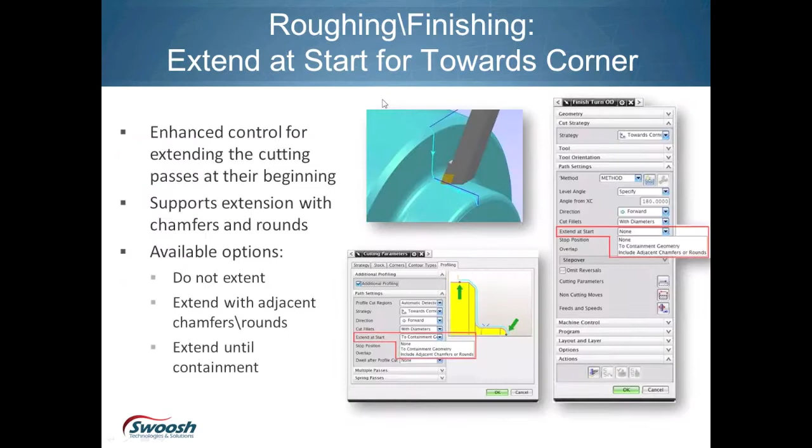Here's an example of how they've changed this extend at start towards corner. So we can control this a little bit more, where we used to not have any control over it before. When you don't extend it, it does not extend the cut. When you extend until the containment's been chosen, it's going to extend it all the way up to the containment. Or you can extend until chamfers and rounds, and it will go in and cut all the way up from the chamfers and the rounds. So that was established in the software too and changed.

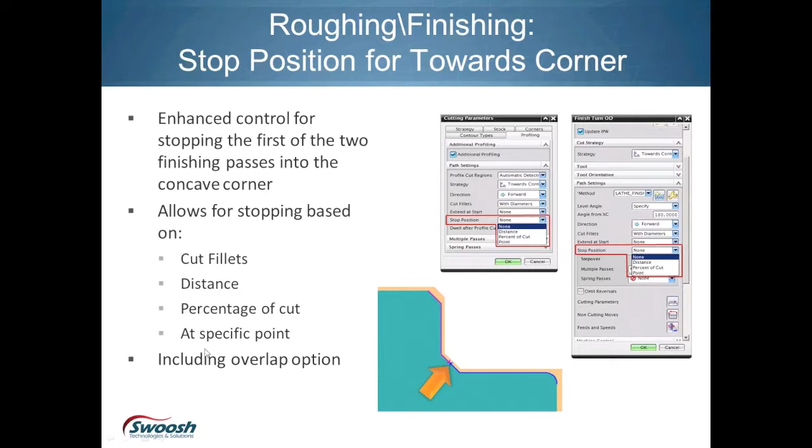They also applied the stop position for towards corners. So now you can specify where you want that corner to stop at. So under stopping position inside the cutting parameters in the turning module, just select how you want that point to be established. So it allows for stopping based on cut fillets, distance, percentage of cut, or at a specific point that you just go out and pick. And then you can tell how you want it to cut.

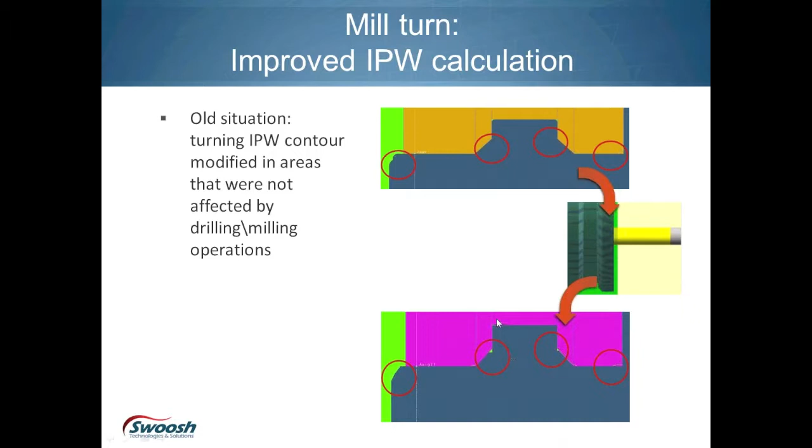We've also got improved IPW calculations inside of the software for mill-turns. So the old situation was turning IPW contour modified in areas that were not affected by drilling or milling. And you can see down here that was not affected, and it would sometimes show up as bad. But now in NX8 it doesn't show up because they fixed it.

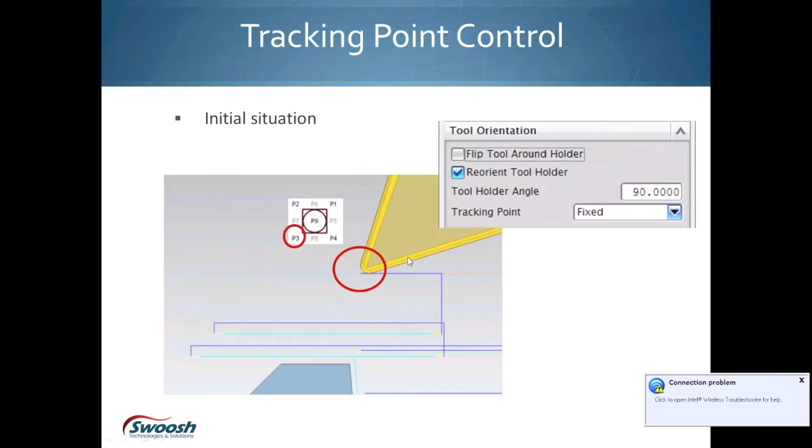You can also show rotate with holder. So if you do a P3, you want to rotate it. We're rotating it. Now it's rotating to P8. So the tracking points have been adjusted so that when you're using a tool in a different toolpath and you rotate the tool around, you have much more control with the tracking.

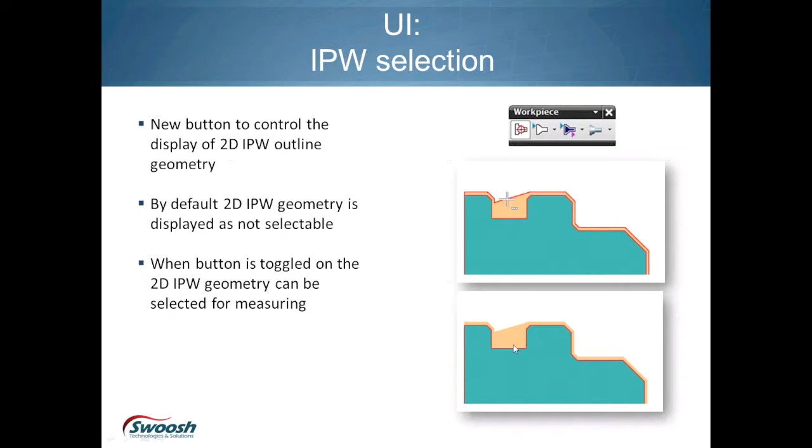The IPW selection, I'm going to try to hurry up because I know it's getting a little later. So the IPW now is selectable, so you can do a measurement between the IPW and the area. You also get a nice work plane that shows the work plane of the lathe inside of the view when you select on the MCS.

The last thing to talk about really is that we've now added what we call MRL, which is the Manufacturing Resource Library inside of Teamcenter. The Manufacturing Resource Library is a fantastic tool that can manage all of your tooling database requirements for your shop. So we can come in and build all the tools inside of NX or inside of Teamcenter, put them all together and build the tools all within Teamcenter.

So the software allows you to find out what tool is going to be the best tool to cut for your job. Where's the tools located? You don't have to go around the shop; I should already know what tools I have in my database in my crib. So I should have all those tools already pre-done, pre-modeled, at least gotten the information from like Sandvik or Walter or whoever that's out there, and taken the tools and assembled the tools into a usable format so I can see the tool in the holder and everything applied, so that when I go to cut, I know what I'm cutting with when I go out to the machine shop floor with my program.

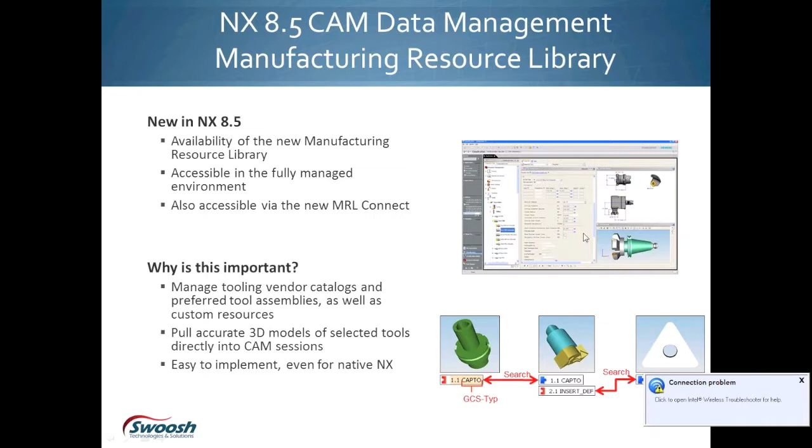So the MRL just allows you to bring all this information together, as well as your heads, your tools, your inserts, everything that needs to be brought together is stored in the database, and then it's just literally put together, and this is what I use. Like it says, it allows you to easily manage, find, and use the manufacturing resources that we as NC programmers need to use inside the shop. So instead of a simple looking tool, you might be seeing, actually, this is what my tool actually looks like in the machine shop. So we can actually show the tools.

Here's just a full tooling workflow. So the first thing to do is to select a tooling catalog that you're going to work with. A lot of tooling catalogs are getting on board with it, and they're putting their data out inside the database, like Sandvik, ISCAR, a lot of different tooling manufacturers. So you'll have the tool and vendor catalog, then you'll come into the custom components and you'll see all the components, and then you put the component all together and assemble it, and then once it's assembled, it can be used inside of your CAM operations so that it's tracked that this tool is being used, and the person on the shop floor knows that this is the tooling that needs to be used for my part catalog. So it's basically 1, 2, 3.

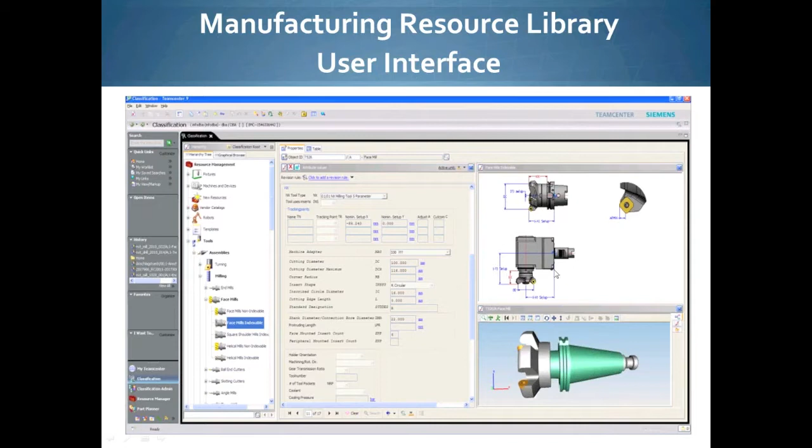A lot of companies are getting on board with it. Kennametal and Sandvik, I believe, are already on board. ISCAR might be on board. There's several that are on board with supplying back that information for our NX Teamcenter information. So typically what you do is, here's just the user interface for it. You'll see the tools with all the definitions of what the distances are for the tools, the critical dimensions on the tools, and then you'll see an example of what the tool looks like.

And when we go into NX, here's all the tool library attributes. Here's just the schematic of the drawings of the tools, and then there's the 3D models. And we'll just use the 3D models inside of NX. You can either show this tool as spinning or non-spinning when it's inside of NX and it's cutting. So typically it would be non-spinning inside of NX.

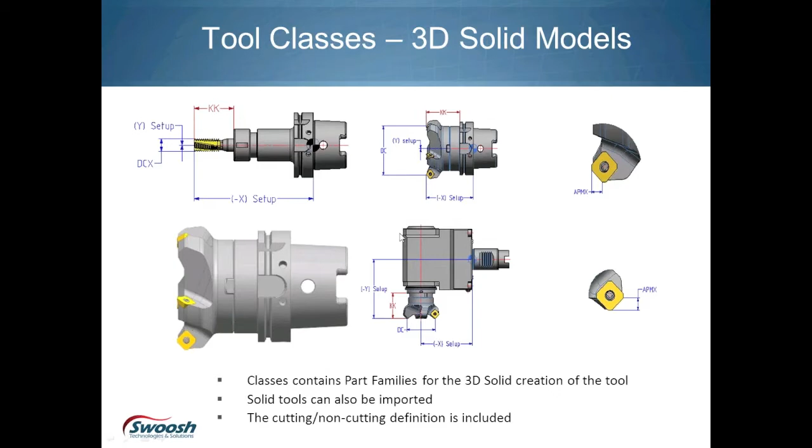We also have Shop Floor Connect for Teamcenter, which will take and push the programs out to the machine tool and make it more centralized, so all the tools are stored in the Teamcenter database, all the operations are stored, all the programs are created and put inside there, all the tooling for perishable tools as well as your fixtures, that's all stored within Teamcenter. It then makes it easier to just push it. Whatever the person in the shop, who might be your foreman, wants to look at the data, he can open up anything and take a look at it.